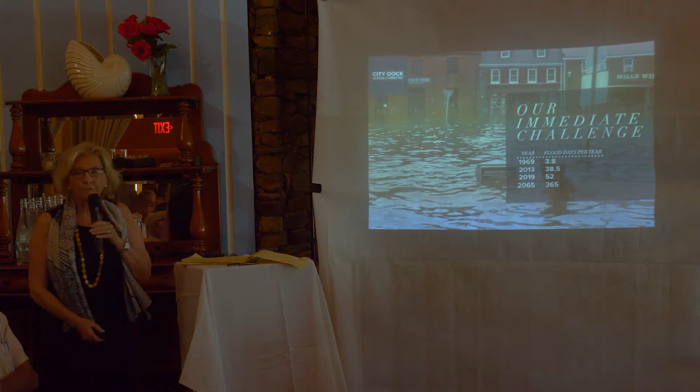and let's see if this will do it now, 52 days a year of flooding. So our mission has been, as a group, let's see, okay, I can see this is going to be, there we go.

Our mission as a group has been to address the resiliency challenges that are existential for Annapolis, as well as to create a world-class public space.

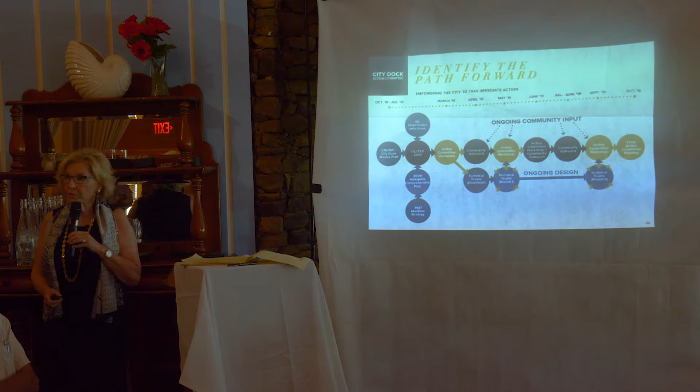So what's been the process? Many of you have been directly involved, and many of you tangentially involved. We are... I'm sure I'll never get the pointer to work here. Aha, we are right here.

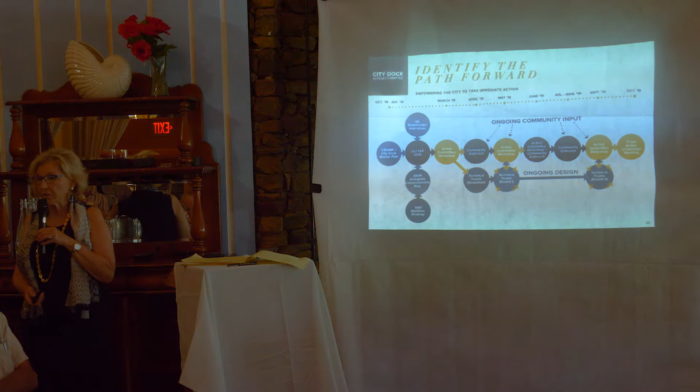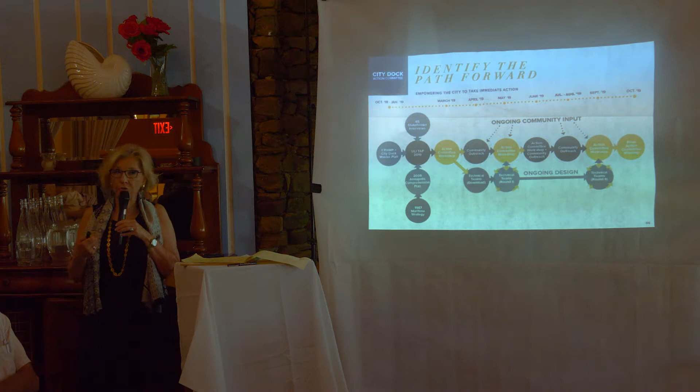We've had 4 City Dock Action Committee meetings, extensive community outreach over the summer, and a huge meeting with over 225 people in May. Now we are looking at more outreach over the next 2 months to parts of the city that haven't been as directly involved, and a final City Dock Action Committee meeting at the end of October.

So what's all transpired in that time? A whole variety of things. There's been the Burtis group, and I see Rodney and Grant in the back. They had an outreach meeting this summer.

The community character group, where are they? They're right here. They've had surveys and a whole variety of outreach efforts.

In addition, individuals like Ellen Moyer and Gary Jobson have been writing articles. People like Karen Brown and Ron Jarishaw have been working to put together the materials from all of you. From the business group, Joe Rubino has been working directly with the businesses, as well as Schein with the City Dock businesses. There's just been an incredible amount of effort.

In the midst of all this, we went to the City Council in the summer, and then in the fall we came back, and at the first meeting, September 5th, we went to the Planning Commission. So when we went to the Planning Commission, we took what all of you have done.

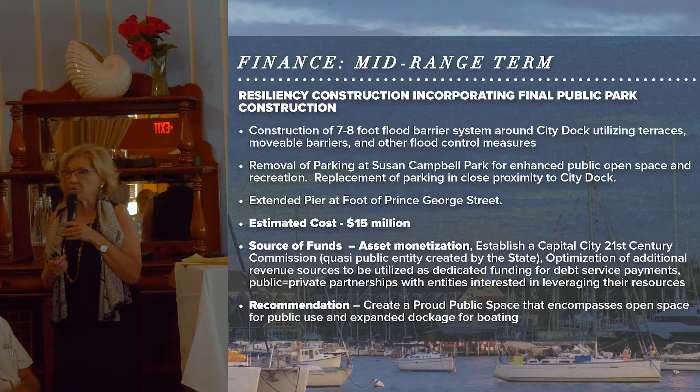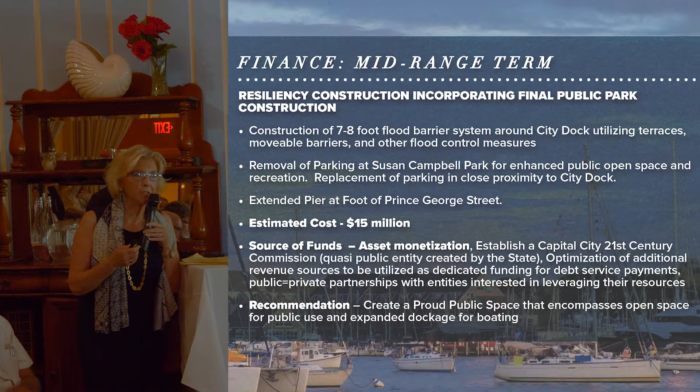And then last but certainly not least is the Financial Tools Group, which identified an approach to fund, on an ongoing basis, what would be around a $3 million a year debt service so that all of these improvements can take place. So what we heard from council and the commission was fantastic.

The commission used the word 'blown away' by your professionalism. Council talked about maintaining the momentum. People were very excited about each of the ideas, but basically they said let's go forward and make sure we can make this happen. The city is taking action right now as we speak - they released a request for qualifications a few weeks ago.

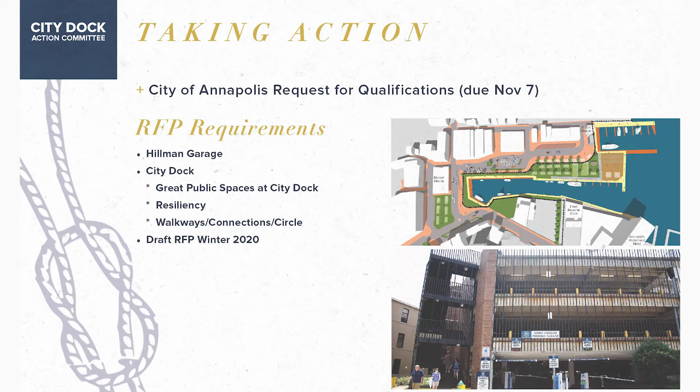Dan Dees is here, as well as David Jarrell, who put that together, looking for the private sector to come in and recommend to the city the most cost-efficient, best approach for redoing Hillman, as well as the city dock. There will probably be a request for proposals put out sometime this winter, but they got a great initial response. There were about 50 or 75 people at that meeting. It was fantastic. So tonight, after you all listen to this group present, our designers and architects, we're going to ask each one of the teams, is this what you envisioned? Is this the city dock that we've talked about? Is this the city dock that is reimagined to be a place where you and your families want to come in the future? Is there anything we missed? So with that, I'm going to turn this over to Michael Beatty, and he can talk with you about the context.

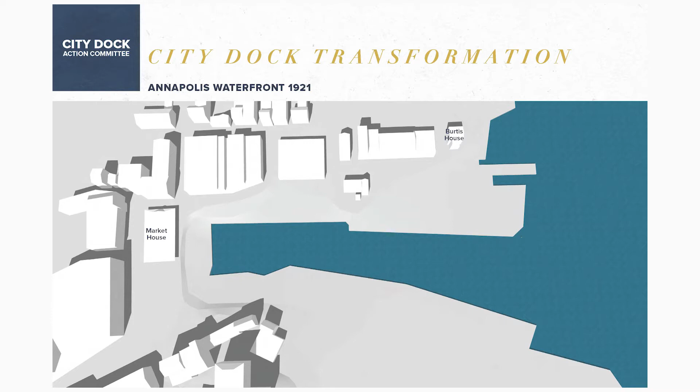And then this is more or less our current configuration, a diagram of that current configuration. I'm sorry I'm blocking your view, if you want to pull up. So again, as you can see, we know the condition that is there.

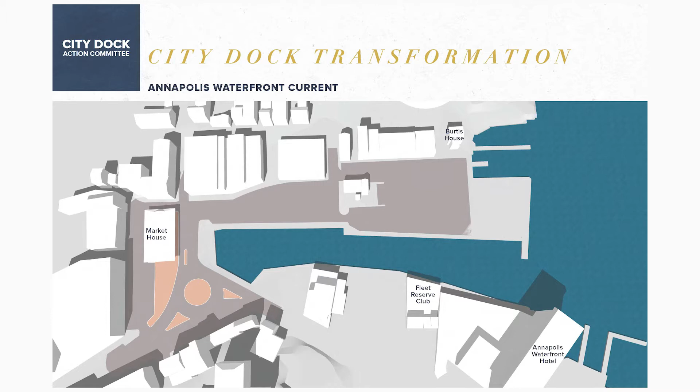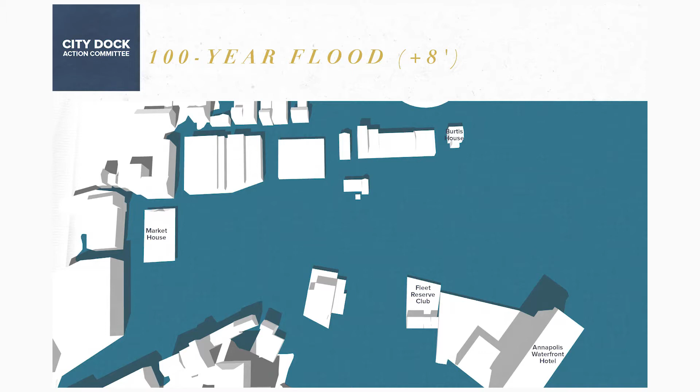So we wanted to use this as a reference to think about what happens when we have a flood, like we did 15 years ago, when we get up to elevation 8 with water. You see how much we lose of the town, and we've got to address this issue. We're fortunate to have some very passionate people here who understand a lot of these resiliency issues, and Zoe's going to talk about that in a few minutes.

So our new plan for City Dock really starts with a couple of big picture desires I want to remind you. Number one, when we had the ULI TAP here, there was tremendous discussion about people being able to get to the water's edge, to dip their toe in the water if they dared. So the idea is to create a promenade - a goal to have a promenade someday that goes all the way around the harbor. We know there are some challenges with that in the short run, and we'll work around that.

You'll see that we've come down Newman Street with a walkway. We think that's a great opportunity ultimately for a brick sidewalk. But we love the idea of being accessible along the entire waterfront. Unfortunately, this plan doesn't show the Naval Academy, but even to the extent that we can get really adjacent to the Naval Academy and maybe even take some land back, that would be great. We'll talk about that later.

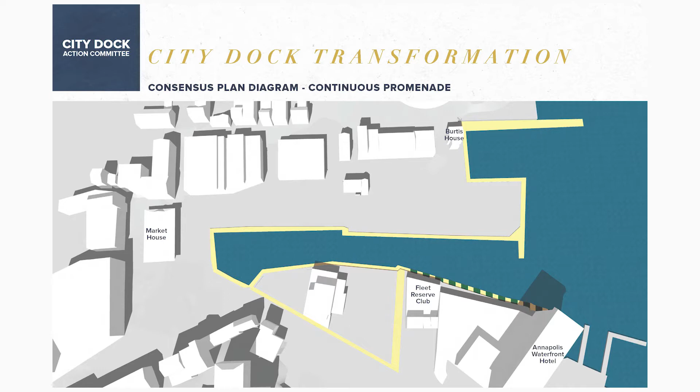Green space. We know how important it is to have green space here, and this is where we first started outlining where we could put in green space. We know we have to reserve some parking at City Dock, but we thought this would be an opportunity. We think there are opportunities to expand the public space next to the market house. While this is shown green right now, it will really be more paved public space, but there are a lot of opportunities, and Leo's going to talk about some of those coming up.

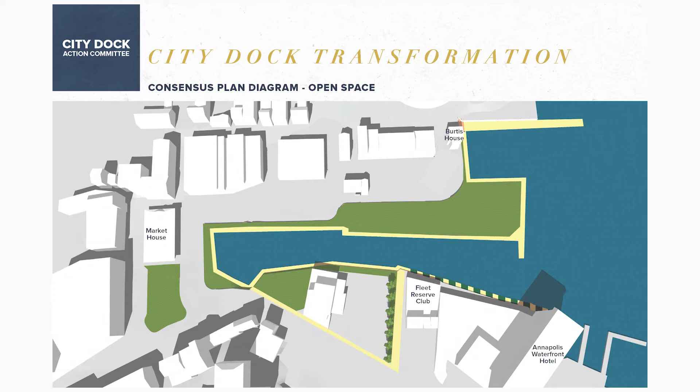We've also talked about reducing the footprint of the Harbor Master building. We think that building is a little too big, a little too clunky, and while it may not be the top priority to move it, some of those uses could go to the Burtis House.

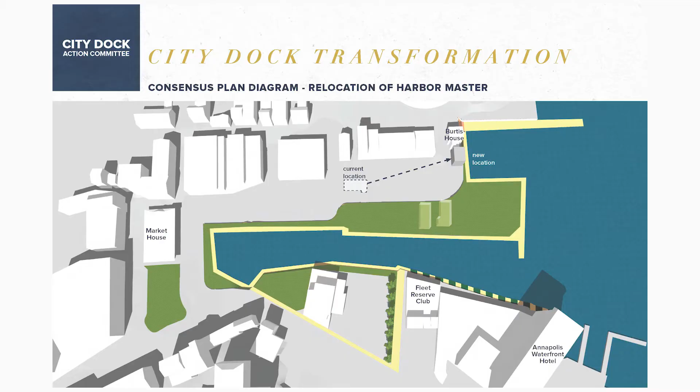You also see in some of these plans ghosted-in structures, former buildings that were there, which we thought could be interesting to have a skeletal memory of, providing some shade and canvas for City Dock. Then again, the pedestrian experience, retaining some of the existing parking.

Since this plan was done, we actually think we can save a little bit more parking than what you're seeing now. As Michael said, it's 16 feet along the north side of the water, and that seems adequate. It just all kind of falls apart when you get to the Harbor Master House.

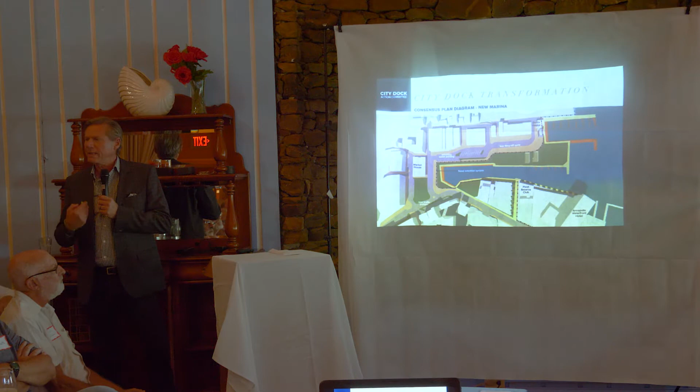Resiliency - we'll talk about that some more soon, but that black dotted line is one thought about where the flood barrier can go to protect downtown, and at least this zone, from rising seawaters. That line has changed a bit, and you'll see in the plans we share in a few minutes.

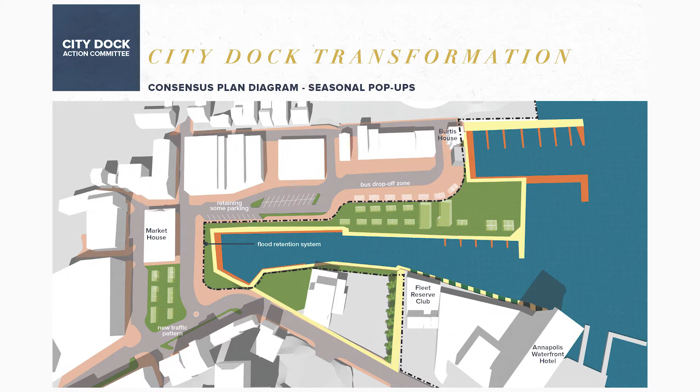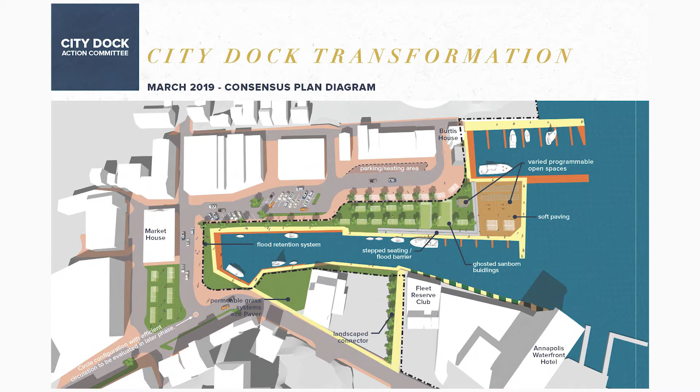Programming - the great opportunity to do all the things at the harbor, at City Dock, that we want to see happen there: festivals, entertainment, recreation, games, gatherings. This was kind of our consensus diagram in the spring, in March, where we brought all those elements in, starting to suggest some of the activity that can happen at City Dock.

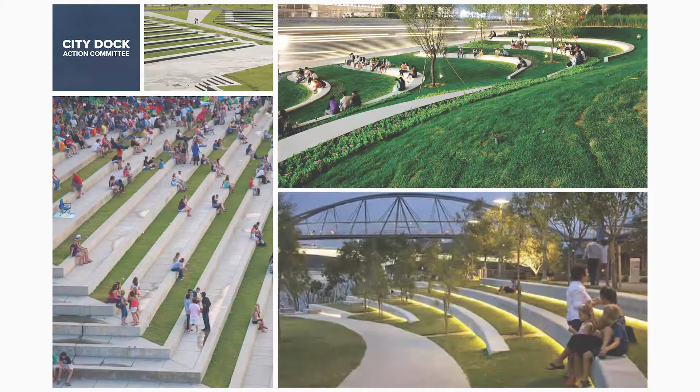Landscaping, seating opportunities - we know we want some of that. Any opportunities to get grass and a little bit of shading to help cool things off will be important. These steps have been important, and we've talked a few times about the opportunity to use them to allow some to flood during a flood event, while still keeping the heart and soul of City Dock and some of those raised areas. That's what we think will be important here.

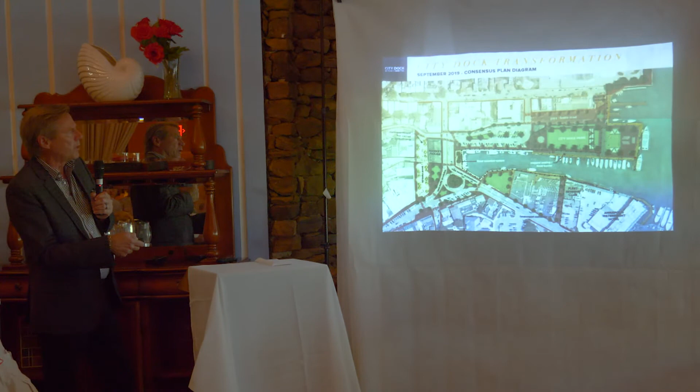Those are some of the more critical aspects of this plan. I also want to mention, just to the north of the park, in front of what's currently Latitude 38, we'd like to make that a kind of plaza space that has restricted vehicular access. The idea is that it's available for fire trucks, it's available for deliveries, but we really want to discourage cars from going in there.

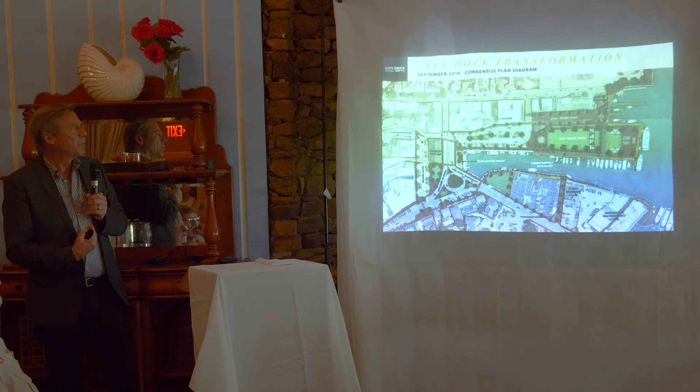There is the opportunity still to get some parking spaces, maybe valet parking for the restaurant in front of that building. But we really want to try to reduce as much as possible the access through that area, and we see that as a paved plaza. Community functions can spill right over into that space.

We really see this as the primary Uber, Lyft drop-off right there at the end of the paved asphalt. I really believe that this kind of a park is going to change the character of City Dock and make a huge difference. I think we're all going to have to give a little bit. It's not going to be quite as convenient in a few ways, as I mentioned before, but I think it's going to make a huge difference.

Very important for the city, and could be really transformational—into how this is perceived by the public and how it is used by the public. So Leo, if you want to come up please and talk about the market house and that area and the circle, appreciate it.

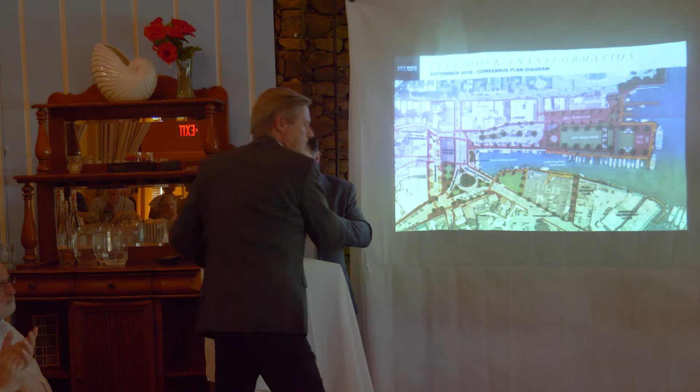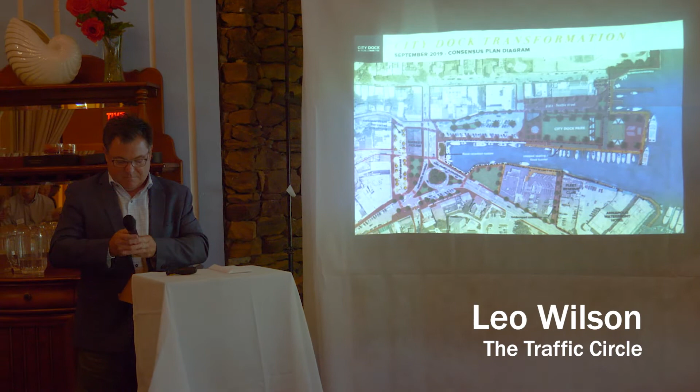Okay. Bryce, thank you. Does that sound all right? No. Right now? I'll try and keep it close.

So my name's Leo Wilson. After I talk a little bit about the part that we focused on, Chris is going to talk about some of the area near the market house. One of the questions that came up several times during the discussions through this process is the circle. What are we going to do with the circle? And if you can remember back to when the City Dock Master Plan was developed.

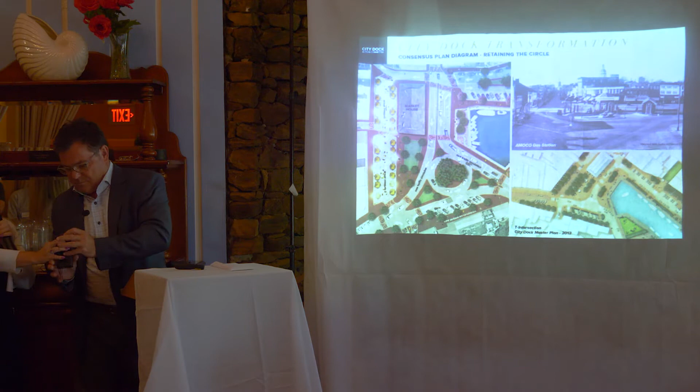Sure. How's that? We got to speak up. How's that? Yeah, gosh, I'm sorry.

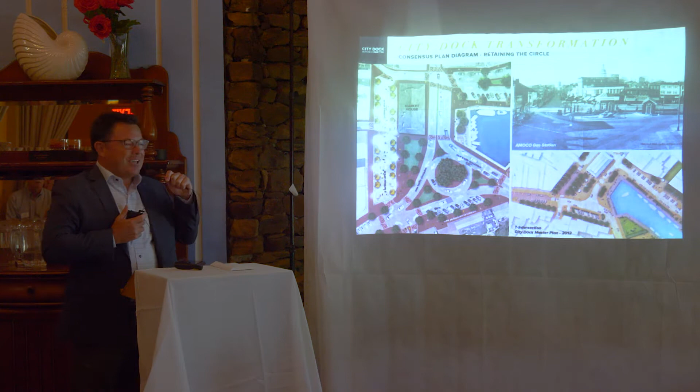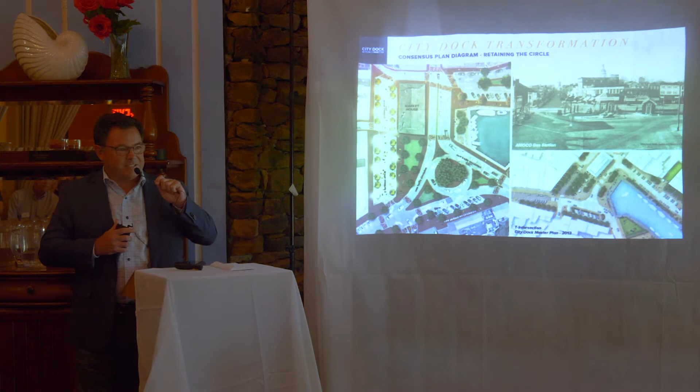When we were looking at the area of the circle, remember the City Dock Master Plan included an alternative for a T intersection there? We initially thought the T made a lot of sense and would solve some problems over there. But when we went back out to the larger group and asked whether or not that's a good idea, the resounding answer we heard pretty loudly was that's a hard no. And I think there's a couple of good reasons for that. One is it's a pretty clear link to our past. The circle has been there for a long, long time.

So we started to think about, well, what's the real problem with the circle? And the circle is not the problem. The problem is the conflict between the pedestrian experience and the automobile experience that happens in this entire precinct. Anyone who's been there on a Saturday trying to get through on a car when there's that on and off flow of pedestrians across the area can see how impossible it is to navigate.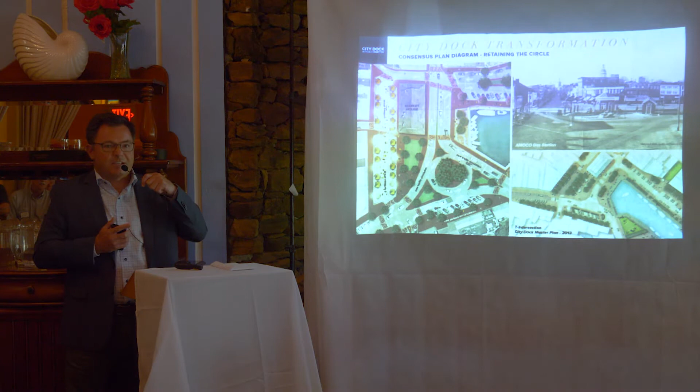So we took a harder look at this and said, well, let's look at the possibility of leaving this circle as it sits today, and let's look at the areas around this circle and see where we're really having the problems. The problem is that there are 3 and 4 lanes of traffic in some areas around the circle, some of them almost 5 by the time you figure out what's really left. So what we did is we tried to look at an opportunity to increase areas for pedestrians to move around the circle.

So this is kind of no man's land right now, right? There's no way to cross that safely. It kind of starts back here, and you really don't feel safe till almost over here. So we decided there's really—and it goes to 1 lane up here when you come off the circle to go up Main Street.

So what if we pitch this up a little bit and force people into more defined lanes that could still allow the through flow of traffic without interruption, and provide more opportunity for green space and pedestrian space around the circle? So you'll see there's a larger green space here. We don't know what we're going to use that for yet, other than not cars.

And the same here—I would like to be able to cross the street here and have a spot to break so I don't have to do the gauntlet across here. It's like Frogger, I guess, you kind of have to move back and forth and hope. So adding a little more green space around here and opportunities for pedestrians to safely move around this area, I think will change it quite a bit.

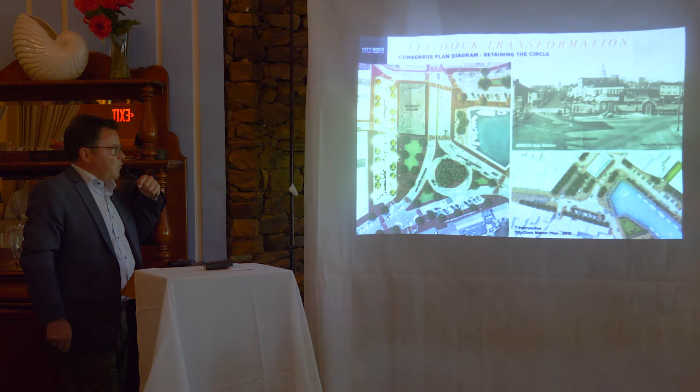That could be used for art shows, that could be used for expanded use from both the market house on this side after loading is complete and also the businesses over here. So if we think just a little bit differently about how this space is used, then we might be able to get more use out of it for people and less for cars.

We're sensitive to the fact that the cars are still a problem and we're going to have to deal with them. So these spaces are in flux, much like the space in front of the Latitude 38. That can be used for different things at different times, and we'll figure out how to use those together. But I think these are nice opportunities now, with the market house working pretty nicely, to change the character of these spaces.

And then Chris is going to talk a little bit more about connectivity and trying to control and provide connections from one spot to another that work a little better than they do today.

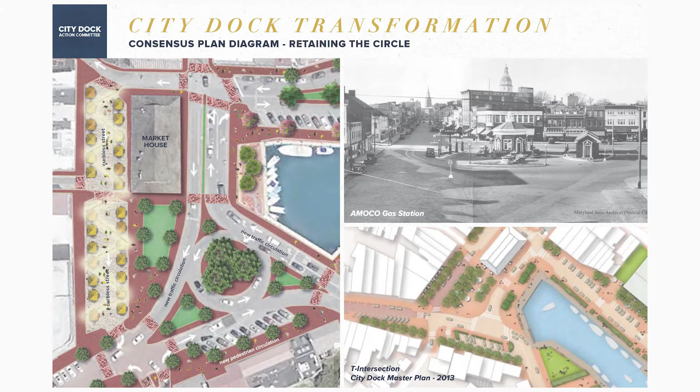It wasn't that long ago that we had police officers there on the weekend to help us figure that out. I'm not sure what happened to that, but it sure would be nice to have them right now. In lieu of having them back, if we could control the points and give pauses between the two, I think we might do a little better.

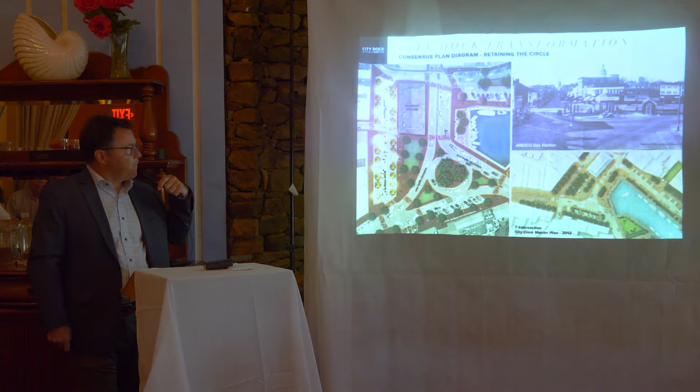So I think I like the circle a little better. I hope everyone else does. I think the additional green space and a little less car space is something we can probably live with. And looking forward to some input on these ideas, and I'm going to turn it over to Chris to talk about the connectivity.

Well, thanks for showing me how. There, I got it on the first time.

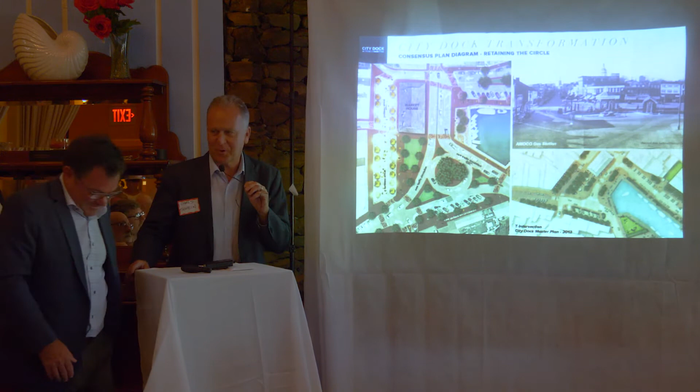Hi everybody, I'm Chris Schein on the CDAC Design Committee, and I think that some of the things I'm going to talk about really have been touched upon by everybody that presented.

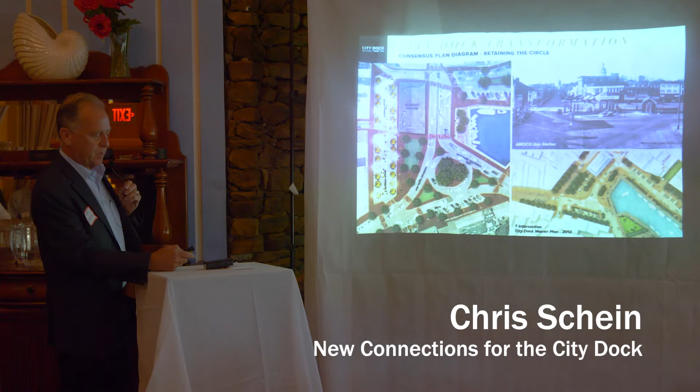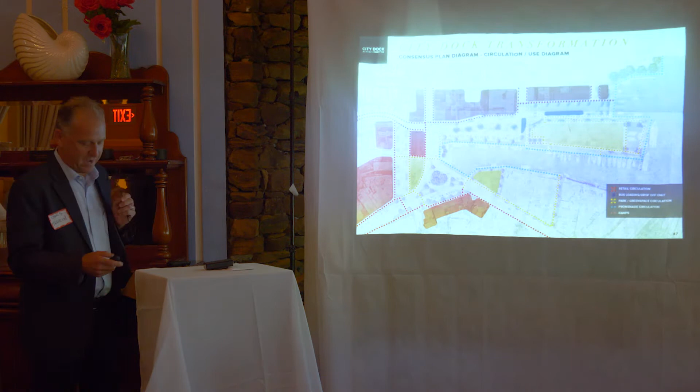And I'll just advance this slide. So this is not nearly as sexy a slide, a diagram with some dots on it, but just to run you through and maybe summarize some of the key components. It's connectivity, but it also relates to other things like retail and commerce and the importance of streetscape to retail.

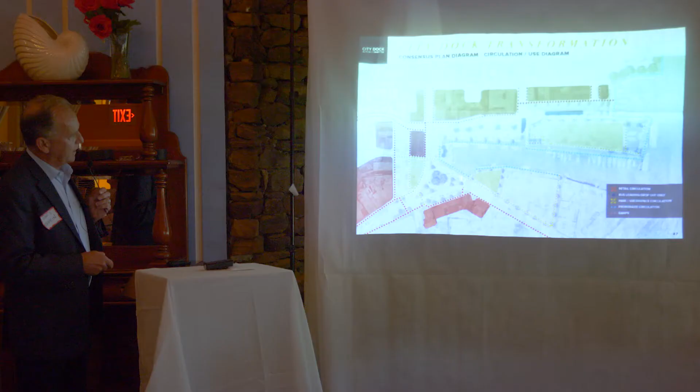But the notion that—and is this the pointer? Sorry, which one is it? There we go. To pick up on the circle, I think that Leo did a great job summarizing how we got to preserving the circle, but maybe modifying it.

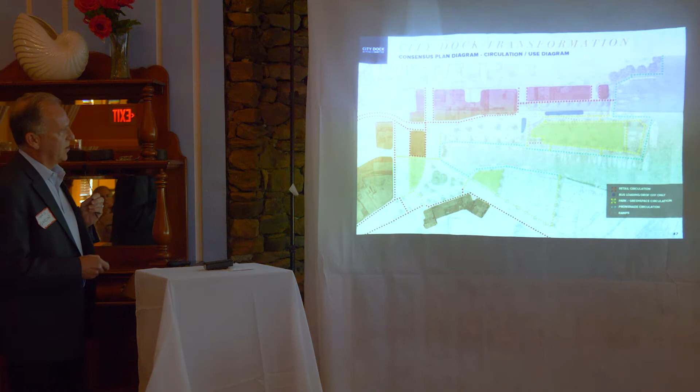But what that does do is leave us sort of with a connectivity issue. Maybe to just jump on that again. I remember when we had crossings here, we had crossings here, we have had crossing there. Now we have chains. It's changed over the last 25 years. Sorry, but you can't see, so I'll stand back and try to be skinnier.

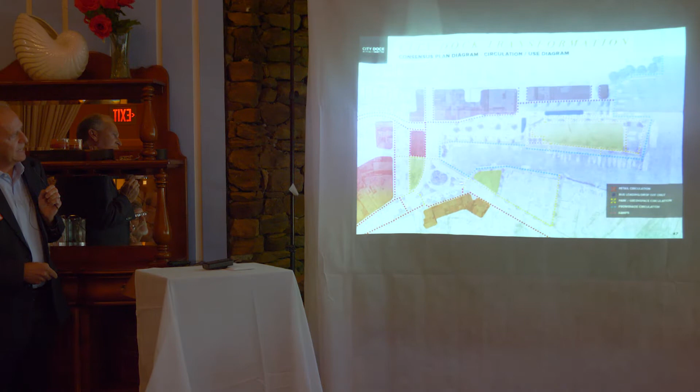Yeah, so I think that it's really critical if the circle stays. What Leo is saying here is by adding and expanding these landscape areas, you're also providing the opportunity for more pedestrian crossings and a place to get halfway across and wait and go.

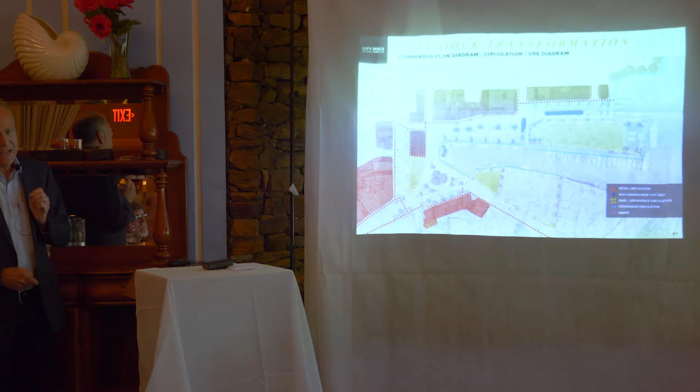And this really is a management issue from the city's perspective, but right now we don't have all these crossings, right? And we need more, because basically if you don't cross here or down here, you have to go all the way to the corner to cross, and it just keeps everybody from getting down here. So that's to start.

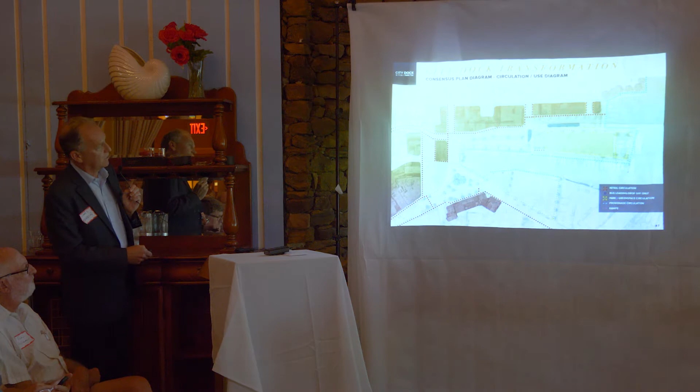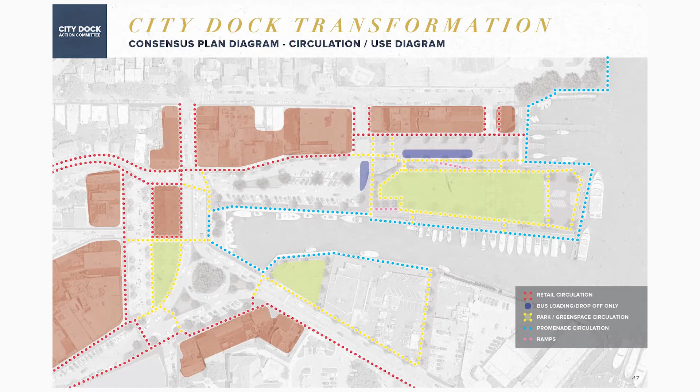The second big move is you'll see these red dots, and really the reason they're red here is that this is really the streetscape that interacts with the buildings and the businesses in Annapolis, right? These are retail, mostly establishments, and in most cases Annapolis is pretty restricted. In some places it's wide enough, but it works well enough. There are other places where it's really quite wide, in front of Goodies and over by Starbucks, where you just get a lot more activity because the sidewalks are wider.

But where it starts to disintegrate, Michael did a great job of saying this is pretty good, 16 feet wide works pretty well for Annapolis. But as you go down, it gets skinnier and skinnier and just disappears. This is important not only for pedestrians to get to the waterfront, the newly utilized Burtis House, and the park, but also for business establishments to utilize that streetscape for cafe seating or whatever. So it's more than connectivity, it's really good for business.

Secondly, Bryce did a good job talking about the waterfront promenade, and Michael was mentioning that this width here is really pretty good. It works pretty well. Once again, it's once you get halfway down the city dock that it starts to fall apart, and we have the boardwalk where it's very thin and at different elevations. So our plan is to improve that, make it just as wide and continuous, and carry it as far as we can.

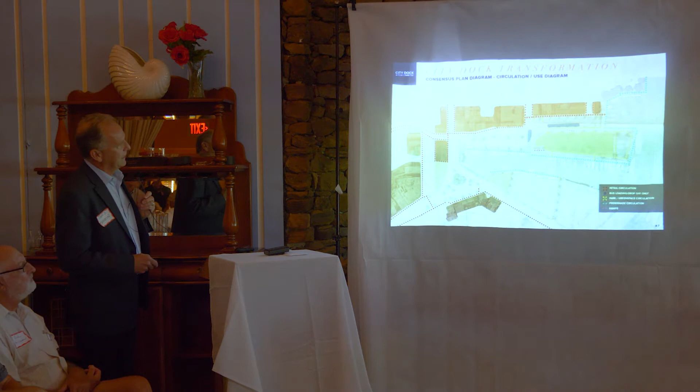The rest of the yellow is the interstitial pedestrian connectivity through to the waterfront. We're trying to re-emphasize, let's get to the waterfront in all directions. And again, if the raised park is raised, we'll have to have ramps. So this works out well. On this side, there's an opportunity for a ramp at the end of this segment to take you straight up to the raised lawn. And there's an opportunity on this side to ramp up from Latitude 38 and from this flex space to get up, and then we would propose stairs.

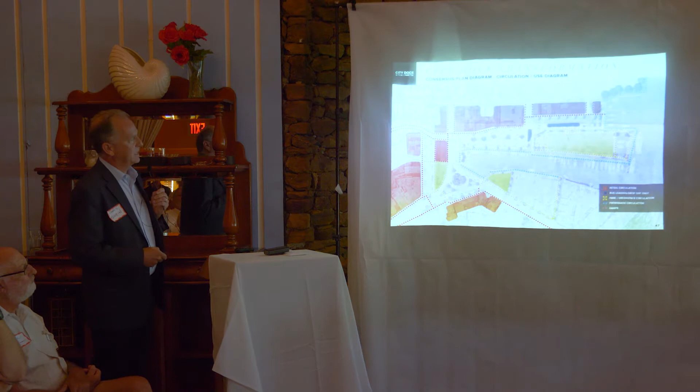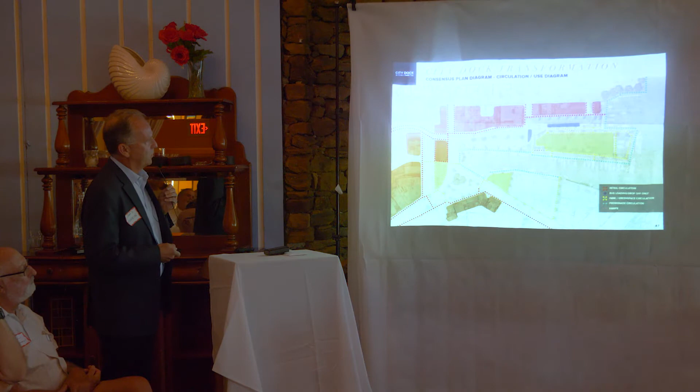Again, this all needs to be designed in the future, but accessibility is really important to this public space, both from a handicap accessibility standpoint and just pure accessibility when you raise things 5 feet up in the air. The last thing is the Newman Street connection back here. We think that'll be a huge improvement, just to make that a nice pedestrian corridor. I think that's it. Thank you very much.

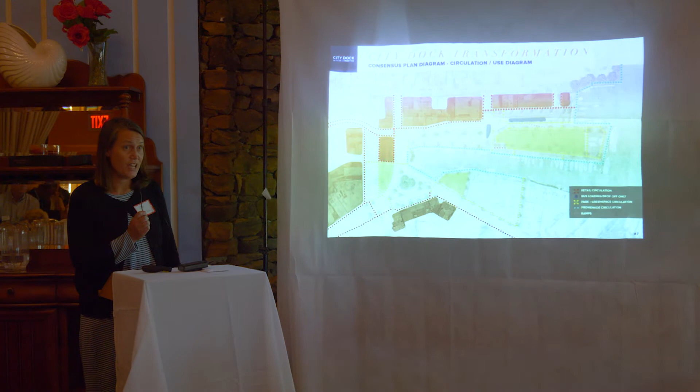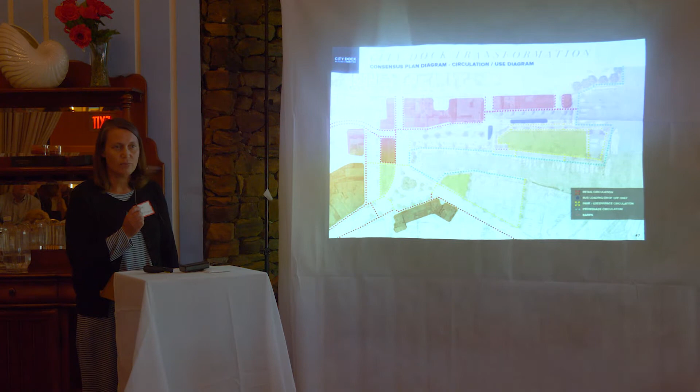I'm Zoe Johnson, representing the Resiliency Work Group, and I wanted to start by saying it's a real pleasure to present to you after the consensus plan drawing, because the Resiliency Work Group met very early on in the process with the Design Work Group. We sat around a table and shared with the Design Group our resiliency planning guidelines.

When you plan for resiliency, you have to think about resiliency as a thread that needs to be sewn throughout a planning process—when you're creating the vision, then as you develop the strategy for executing that vision, and then on a project-by-project basis as you implement individual elements of your projects or strategies.

We feel, and I think you can probably see it tonight, that the design group did a nice job of taking the resiliency planning principles we presented to this work group back in May and integrating those into the design. They integrated concepts associated with urban heat and heat island effects, and incorporated environmentally sensitive design in terms of looking at pervious pavers to help control stormwater flooding and make softer, greener spaces for people, animals, and the environment.

They looked at both long-term impacts associated with coastal flooding—we know we're subject to episodic or periodic coastal floods at any given time. But we also know that as sea level continues to increase, those flood levels can reach higher, and we see on a day-to-day basis that we're vulnerable to nuisance flooding.

All of the elements that the Resilience Group provided to the design group, they've integrated in. We talked about both passive and automatic floodgates, where you can build in staged elevation increases, looking for ways to make sure that pedestrians, citizens, boaters, and recreators can still interact with the water while making sure that we're protecting the assets and our community at the same time.

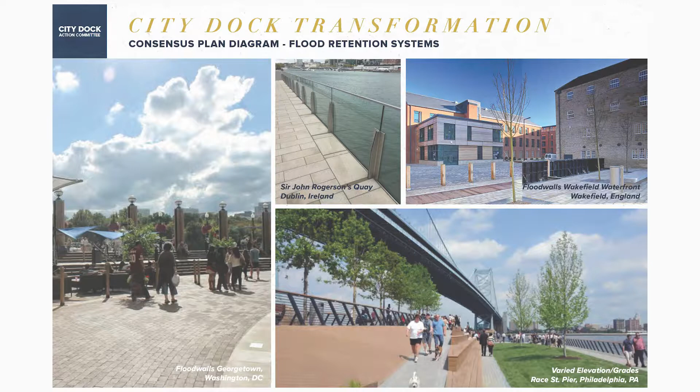So there are examples of flood retention systems and examples of communities that have done this type of planning and integrated concepts associated with economic revitalization and resiliency around the world, and also throughout the country. I think that what you've seen is a really good start.

They call it a start, and I think it really helps us as a city think about how to move forward with continuing to incorporate these design principles and build resilience to future storms.

Am I going the wrong way?

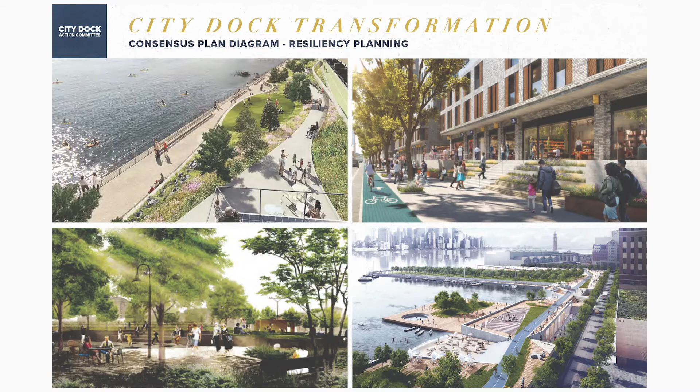So there are 3 opportunities to build resilience in a community, to think about planning for future impacts associated with storms or hazards or climate change. One is good, one is bad, and one is really ugly. These diagrams you see up here were all part of the Rebuild by Design competition held after Hurricane Sandy. Some are up and down the Atlantic coast, and some are illustrations, some are visualizations, and some have actually been executed.

The opportunity, the good, I'll start with the good, is that we're at a good place to think about how to incorporate resiliency and adaptation planning into the city dock. We're not facing an impending storm. We have an economic development opportunity, potentially through the RFQ and an RFP to follow. We can sit back now and think about how to incorporate resiliency and build a better, more resilient project that's going to protect future investments, but that can also allow us to continue to recreate and use that space as we want. The bad example is, after Hurricane Sandy or after Hurricane Isabel, where you want to build resilience in, and you want to plan and rebuild to a higher standard, but you don't have that vision, you don't have that plan. So the fact that we have a plan and that we're working to implement that vision and recommend a vision through this work group, I think is a real opportunity for the city.

The ugly is where you continue to build and rebuild and you're damaged time and time again from a storm, and you keep building the same thing in the same place in the same way, not learning from your mistake, and not using a process like this or recovering from an episodic event as an opportunity to rebuild and create a new future.

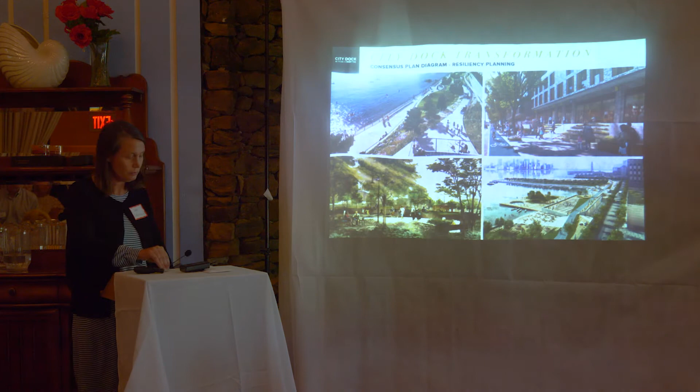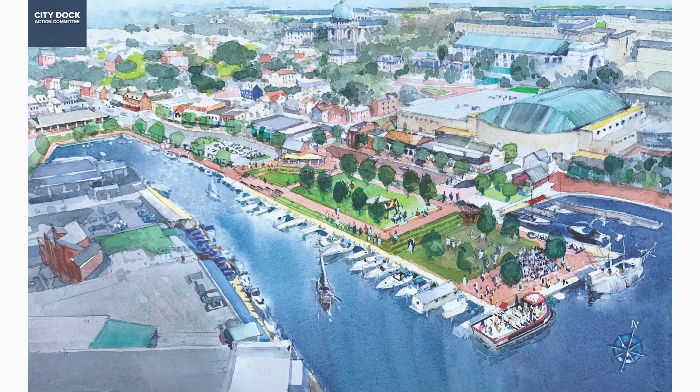Okay, just a few more slides here that we wanted to share, and then we want to get your feedback. But first, this is what we have today. We've talked about it a lot, and this is just one three-dimensional view of what we think City Dock could look like. This is just one option, a bit of a placeholder, a diagram, consensus, but everybody wants to see some kind of visualization, and this is really it.

I just wanted to mention a few things here. We talked about Susan Campbell Park and how we could green up some of that, working with the family to understand some of the goals there that could happen. We talked about the upper raised part here, which has steps that wrap around and provide an opportunity for seating as well as for some control of flooding, and the opportunity for some shading up here on top. I know this tree plan is not meant to be a final configuration, but we do think it needs some green space.

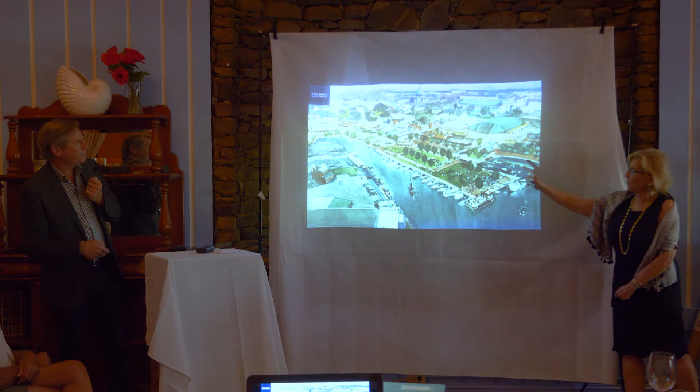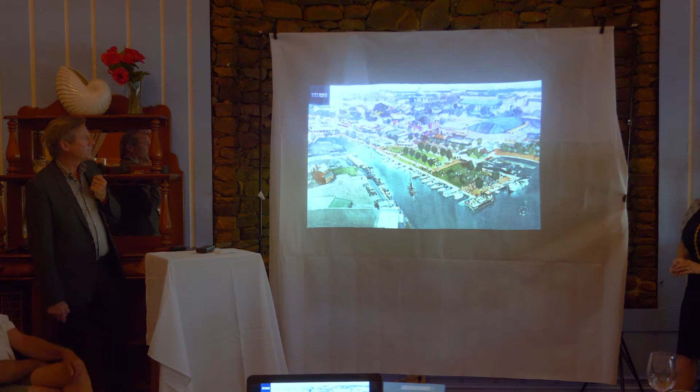Just a shout out here to the boat show. The dimensions here were all from the boat show's drawings that they gave us, incorporated to make sure they had the width and dimension that they needed. There is room for the boat show to be laid out here in a very reasonable way, we think, and it should be better than ever.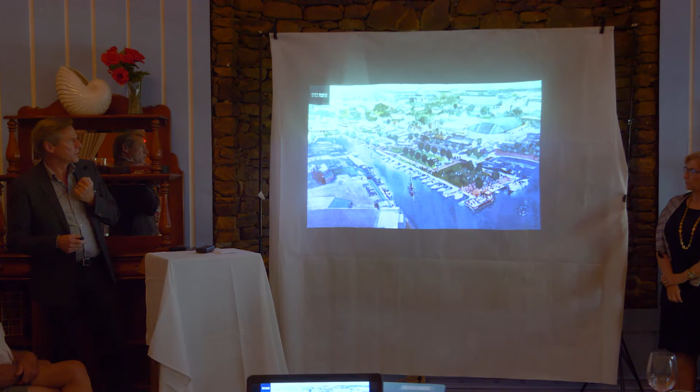The existing parking that we're going to have here with a few new trees that help to shield some of that, provide a little more shade as well. Wrapping around Ego Alley here, we think there's also an opportunity for a few more trees, which we didn't get into the rendering yet, and we'll continue to tweak this as we develop our final report. But also I just want to talk about a few other things, and that kind of plaza space in front of Latitude 38 where the yacht club was temporarily.

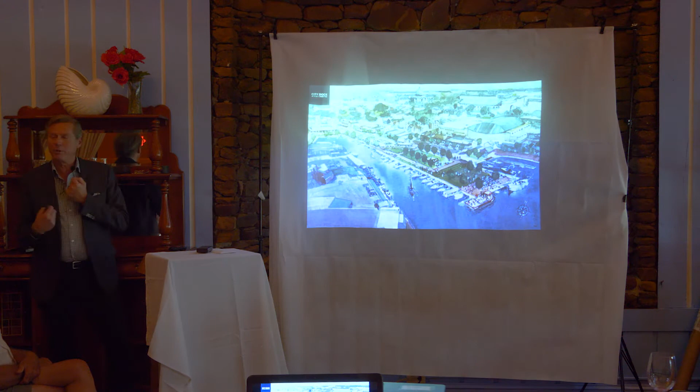This space here along the waterfront - Michael Beatty reminded me that if the Naval Academy could move the gate without giving up any land, so that we could at least have this north portion of the waterfront, it would really make a difference to that dinghy dock area. It would allow us to control and clean up other things. Currently there are a tremendous number of electric panels and things that block your view and access right at the edge of the water, and that would be a great place to change that.

So this gives you some idea of what we're talking about: the continuous promenade and all the other attributes. I really think it could be a wonderful transformational event here in Annapolis. So let's keep working hard to make it happen.

We want to get your feedback, and I thought I'd start by asking if there are any specific questions about this - not so much comments yet, because we want people to formulate comments in their groups, but questions technically about any of the things we proposed.

Can I just say one thing? When I spoke, I forgot to thank the most important person, Robert Clark, and anyone from Historic Annapolis. Could you please stand up, because we wouldn't be here without you. Thank you so much, thank you.

One back here: have engineers been consulted about what we can put on City Dock? Because it's sort of held together by rebar and there's a lot of infrastructure underneath it, and we're trying to add weight to it - is this even possible? The answer is it is possible. I'm an architect, not an engineer, but I don't think that's going to be near the top of our list of issues we'll have to deal with. It's certainly important, but I think we'll be able to deal with it relatively easily. It may even help stabilize the soil, since we may have a lot of compaction going on, but that's going to be important.

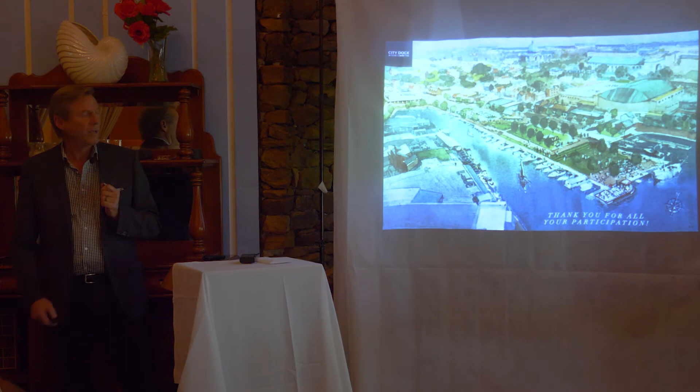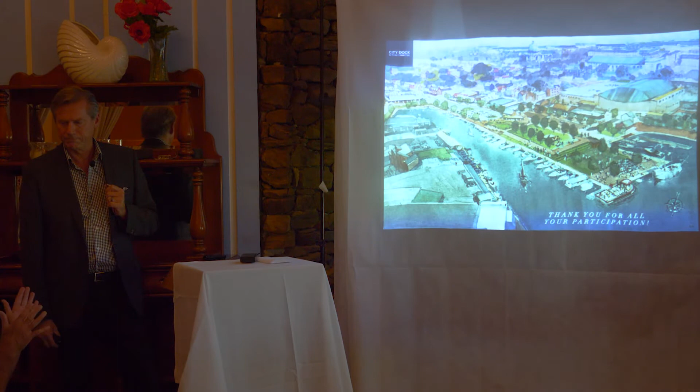Between late spring and early fall, we get about 1,000 buses that come down to City Dock. How are they going to be able to be there, and where do they go when they leave City Dock? We're encouraging buses to come down, drop off here, and continue out and around - making the turn around the end of that parking area, which is a fairly large turnaround area. Except sometimes you get a clump of 6, 8, or 10 buses at once. Yeah, this is going to be one of the areas where we'll need some traffic control and help. It's a busy area. There'll be fewer cars perhaps right there, but we understand the importance of it - it's a very highly trafficked pedestrian zone, and it's going to require some control, just like every great waterfront community has to deal with.

Has the city allowed for this extra control? I think that's beyond our scope right now, I'd say. I was just going to ask.

We would want to discourage buses from parking there with their engines on and waiting. So the blocking of the sight line, the combustion, all that sort of stuff would obviously be better removed. But there's going to be more public transportation to get where we want to be in the city. I think we're relying more and more on Ubers and drop-offs, and people are walking more and more. If they can park their car and walk, most people are happy to do that.

But you're looking at the stadium from walking through there - I don't know where the general parking would be that you take away from this parking. Where is that parking going? Adding capacity to Hillman Garage, as well as using some of those other remote locations. There's plenty of other garages up West Street that are underutilized.

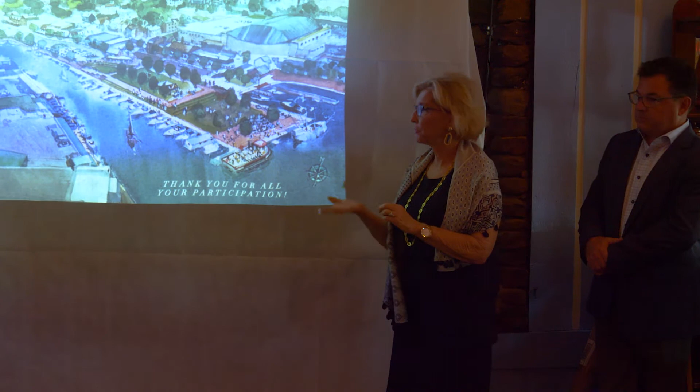But it is the design and planning committee's opinion that buses need to drop off and go somewhere else, outside of this immediate district. You find that to be the case in Newport and in a lot of waterfront communities, because there are places that you want to give to people. The buses sit and pollute the air while they run their engines and block views.

So the question I had was about the elevated platform that you've designed. Will it obstruct any views of the water when you're up higher at Market, Fleet, and that area?

No, it won't, because it'll be up about 4.5 to 5 feet, and that's generally it. When you're standing at elevation 8 to 9 to 10 or 11 and looking out, you'll be looking over elevation 8, so you'll actually have a much better view. Right now, if you stand, you see cars—this will basically put you essentially on the roof of the car.

Oh, when you're standing there—but I was talking about if you're at the Market House, does it obstruct any view of the water? No, that's a good question, but it won't. At 5 feet tall, we'll all be able to see over a 4-foot mound, and it's going to change things a bit, but removing the Harbor Master House or a portion of it will make a difference.

Because of resiliency. Why is it 5 feet, and it is tied directly—the 5 foot 3 inches is tied directly to the flood needs? Did you trace on there where that starts and ties into the Naval Academy wall and ends up? Or is it just, in the rendering, a separate 5-foot-tall platform with steps going down on all sides?

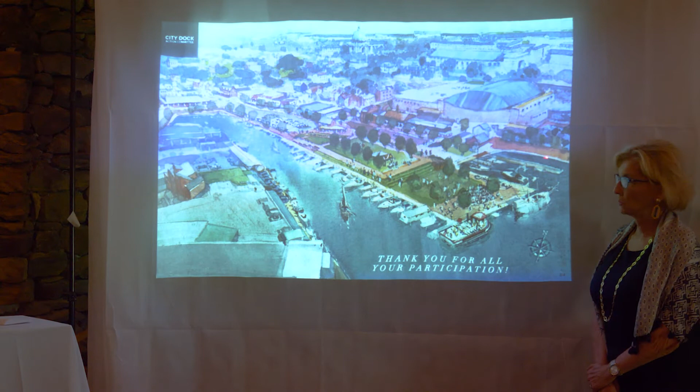What's going to happen is the park in the very middle will be the highest point of the park, and then it'll crown down on either side. This hasn't been designed or engineered yet, but the possibility we see is to tie in right at the Naval Academy, and whether or not the Naval Academy is going to bring it in right on the water's edge, which I believe they probably are—is that correct, Zoe? So it's going to tie in right on the water's edge and make that connection around the Burtis house. We see the Burtis house being raised up probably as well in order to facilitate that change.

Are all the streets going to be raised? Not all the streets, no. Really, it's just going to be this new public space we're building here where the changes will happen. We feel an obligation, of course, to provide the same street elevation adjacent to existing buildings—we can't block anyone's access to their building.

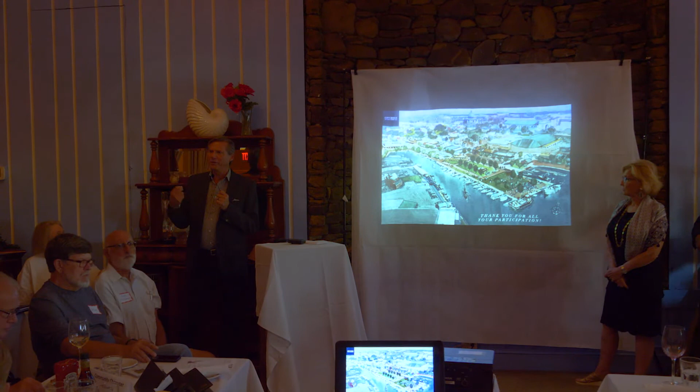Yes, with the Newman Street extension on the other side that's often flooded, is there an elevation component there as well? Because it's impassable a lot of the time, where you're talking about bringing Newman Street down to Ego Alley. Yeah, that's a good point. The pumping engineering solution currently happening is going to help that to some extent. This has to tie into that to avoid the flooding, and exactly how we deal with it right at Newman, I'm not sure, but I think it's solvable.

Leo, do you have any other thoughts about that? I'm not sure we've really solved that or thought about it much further, but there are a number of ways that can be done. And last question, Ellie.

Yes, hi. Bryce, could you speak to your philosophy, other than property ownership, on why you focused on the public space and not the adjacent retail? Was it a placemaking philosophy, or what?

Well, I think first of all, we were working with city-owned land, and everything we're doing is on city-owned land. I think property owners obviously have the right to access their property, and we're not looking to change the immediate sidewalk in front of each building. We would hope and encourage property owners to upgrade sidewalks, facilities, buildings, all of that. But from a placemaking perspective, it's absolutely critical that the public realm be a place where you really want to go, and we're trying to make that a place.

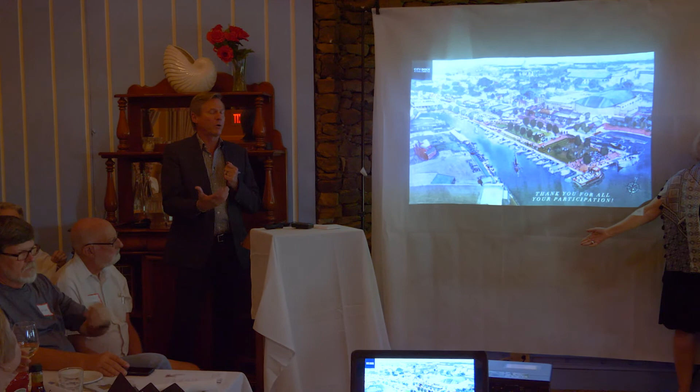And you've got to admit, even in this form, it's a much better place than what's there today. It would make an incredible difference in terms of a lot of things - one being resiliency, the other being comfort, shading, and temperature. So that has a lot to do with it, and that's been our philosophy.

I just wanted to speak to that a little more because I think it's a really good question. This process is about the ability to implement the next step - that's really what I think Annapolis is starving for. We've looked at this ad nauseam. I've lived here a long time, and we've had plans come and go.

I think one easy way to complicate that is to look for some way to involve a public-private partnership with adjacent property owners who have land and maybe some desire to swap and trade pieces. We saw how difficult that was at the 110 site, when there was discussion about buying a part and selling some other part back to the city, and it just went nowhere - mostly because, as willing as both partners might be, the city didn't have the funds to do the trade, and the property owner didn't want to give anything up. So it becomes a one-way street to a stop.

So the concept revolves around our ability to control every component of this. None of this is private property - all of this is public realm. So there's no side deals to make, no 'I hope this works out with an adjacent person.' This gives us the opportunity to move forward as a city with largely every component in our control. Now, we have partners that are very important - the boat show is a critical component to who we are and how we operate, so that has to be investigated carefully so they're not left short. But we also have an obligation to the people who live here to improve the experience down there, because it's not good today. So I think there's middle ground we can find to make both of those things work.

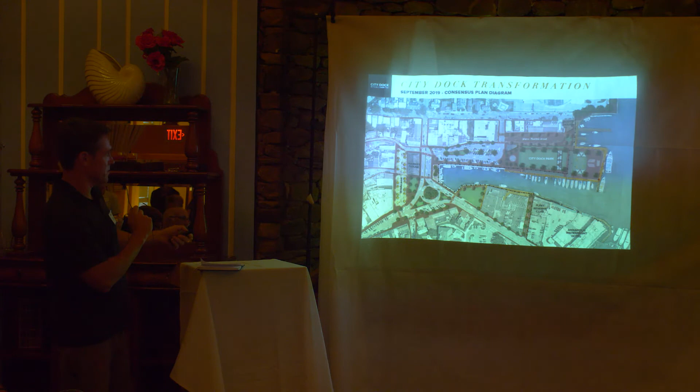Heavy vehicular movement. In this design, as Bryce said, we have the movement of vehicles, be they buses or others, out back into the back alley of Prince George Street, and into this turn right here. What we heard from residents is to do everything we can to keep heavy vehicular traffic and additional traffic off residential streets, and that goes to King George and Prince George obviously. But in general, anything we consider is how we can, via signage or other routing, prevent those kinds of vehicles from moving up those streets. Next.

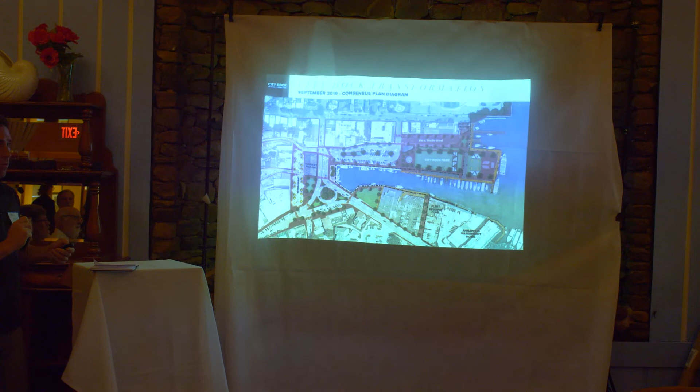Public water access. This is more programming than physical infrastructure, but in the design as presented, we didn't hear anything at all about how the placemaking will integrate public water access from water to land and from land onto water, with the emphasis on getting the public into the water. There was a little lip service to a potential fountain, but that is a huge amenity that we heard a lot about in our discussions with the public.

The Fleet Reserve hosted one night. Thanks, Fleet Reserve, for hosting everybody. And I would just say, my vibe, my personal take on what I think folks would like is...

I think folks generally like the circle. Leo was right that they prefer that over the T, so I think that's a winner.

I think we probably need to do a better job of explaining the bus drop-off. There's so many buses that Mayor Hillman referred to that come down there, where they drop. I think if they drop and go, that's fine, they don't need to be sitting there. But I think the access, getting folks and visitors from out of town to City Dock, and they're not all Naval Academy buses, Eileen, but there's a bus access issue that needs to be refined better.

And the issue of parking is always going to come up. Generally speaking, the vibe I get from a lot of businesses is concern, especially in the off months, January, February, March, where regional locals come down if it's not convenient to park. I think you mitigate that a long way when you say that'll be mitigated with Hillman. I think folks view that as easy walking distance, it's all kind of viewed as downtown. Once you start saying West Street or further, you start to lose them, because then they'll say folks aren't going to walk from West Street to City Dock in January, February, or March, or they won't take a shuttle or go somewhere else. But if it's convenient and easy, I think most folks view Hillman as still in that realm. I think that works a lot.

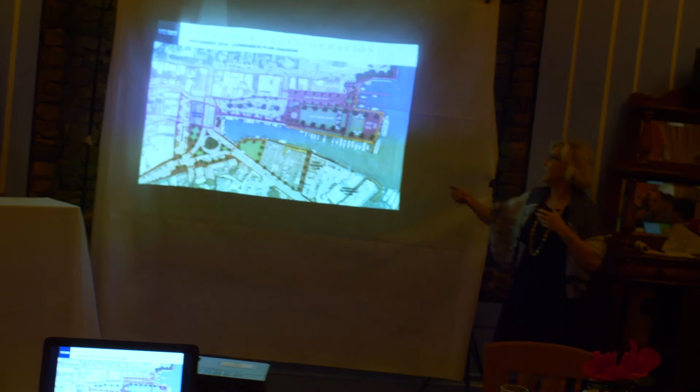Joanne, this is all what we call flexible space, but it would be space where buses with handicap access, any of that, people can come right up here. No, and we talked about how that space would be used, it just wasn't well defined.

There's a lack of activities for small children. So if you're bringing 3-year-olds, 2-year-olds, 5-year-olds down there, what are they going to do? We thought possibly, instead of parking in the space in front of the Fawcett's, we really liked the green space there. Maybe that's a game park where there's oversized checkers or chess or something for children to do.

We need a safe space for non-motorized boats, and possibly relocating the dinghy parking from the end of Ego Alley to allow for people to have access to the water. And there's a lack of heritage engagement.

We were echoing what you were talking about, that this is a historic waterfront, and how are we going to interpret that for people going down there? We thought, as we've suggested before, through seating and climbing facilities, so that there are interactive structures that are maritime related that could also provide seating, climbing, or other entertainment.

We also echo the idea that there needs to be engagement with the water - a fountain, a splash pad. Again, we like the idea of tying the water to the historic nature of this property, but it needs to be unique for Annapolis, not just look like it could be in some place that doesn't have a historic maritime heritage. So there was a lot that we liked, but we need to see more to make sure it's a really useful multi-generational space.